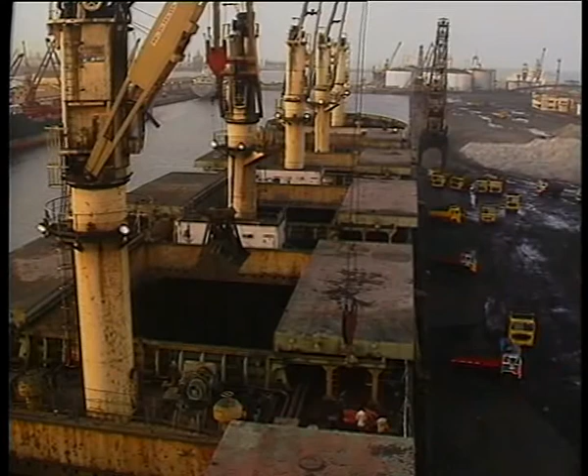Bulk carriers are the workhorses of the world maritime trade, and a high proportion of shipping losses are amongst them. Between 1989 and 1991, more than 10 vessels sank every year, and many more have been found to be severely damaged. Analysis carried out by classification societies reveals that previously damaged vessels become casualties.

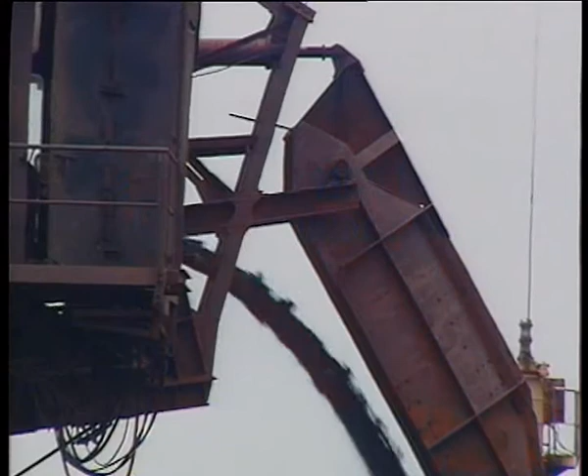The most common cause of damage is corrosion, which weakens the ship's structure. Corrosion increases with age. A number of cargoes, such as coal, with high sulfur content, cause rapid corrosion of the hold. Corrosion increases when the protective paint coating of the steelwork has been worn or wasted away.

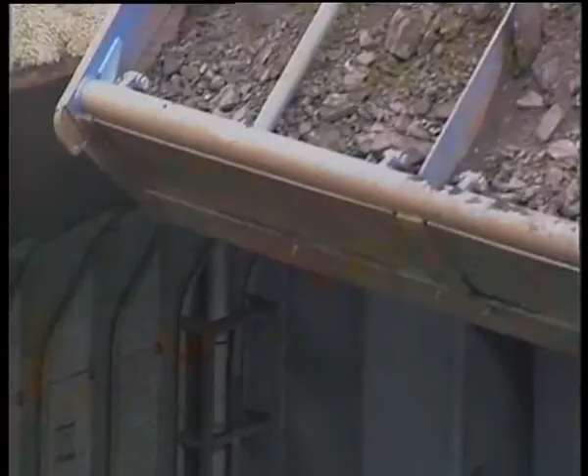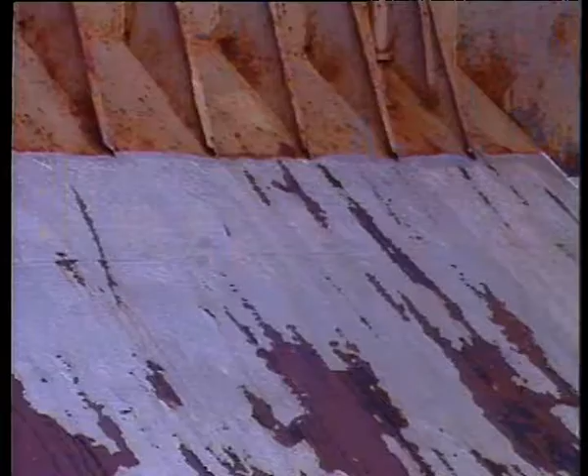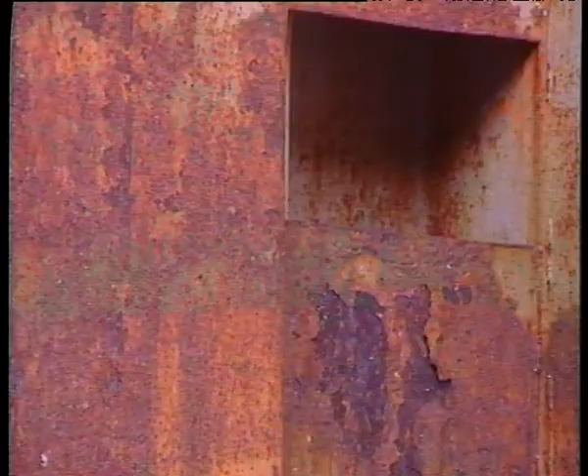Corrosion can be reduced by keeping the holds well painted, cleaning thoroughly after a corrosive cargo has been carried, and by rinsing the holds with fresh water whenever possible. Wasted steelwork, when neglected, has been the basic cause of most bulk carrier losses.

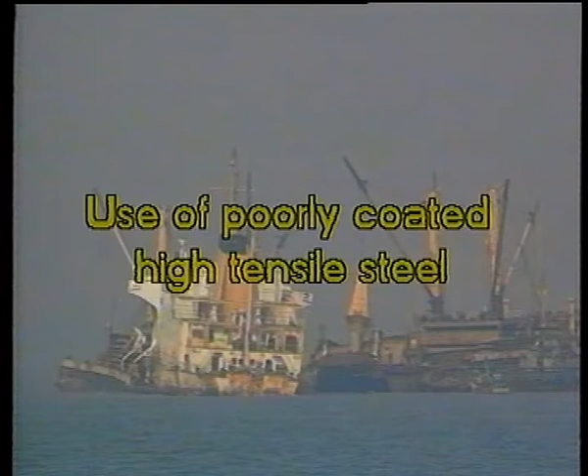Other causes of losses are use of poorly coated high tensile steel, nature of cargo, failure of hatch covers, flooding of holds, possible shift of wet cargo.

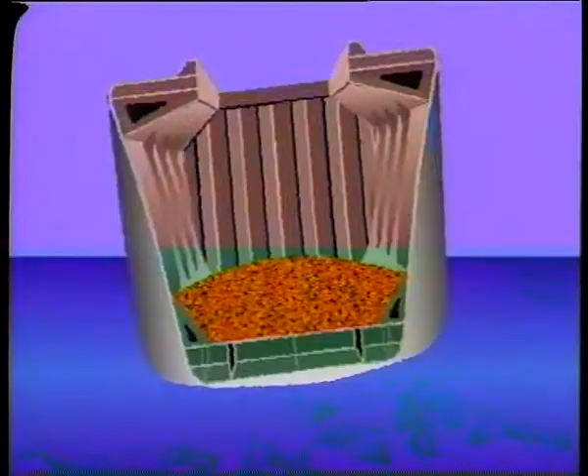Heavy weather conditions have been the main contributory factor in most of the accidents. Heavy swell causes hull vibration. Panting and poundings lead to structural failure. Although ships are designed to withstand this, a weakened ship is at a greater risk.

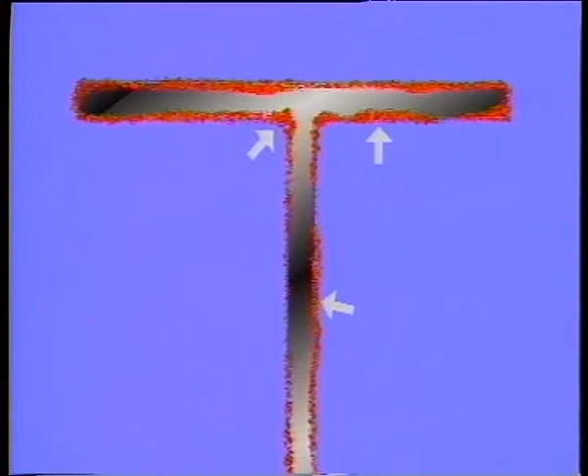Modern ship construction uses high tensile steel, which is thinner and therefore more flexible. Uncoated or inadequately maintained high tensile steel is vulnerable to corrosion. Wasting due to corrosion increases the stresses in the structure. Prevention of corrosion is thus of utmost importance.

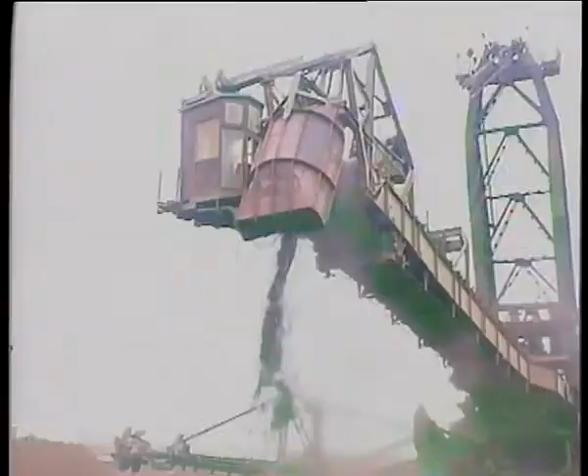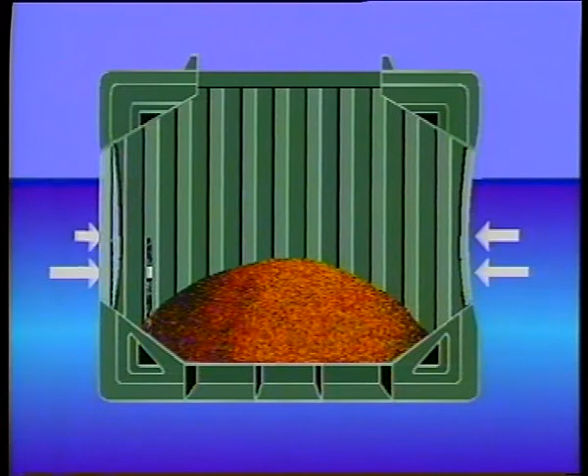Ore, due to its high density, does not occupy much space in the holds, and therefore the water pressure acting on the ship's side is not balanced from within, as is the case while carrying coal or grain. In a badly maintained vessel, bending will loosen the top and bottom ends of the frames. Because of these deficiencies, seawater may enter a hold through fractures in the side shell.

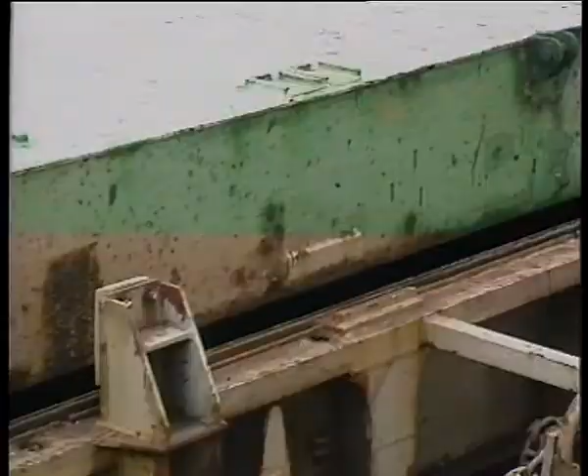Hatch covers which are badly maintained are an important cause of casualties. If the hatch covers have not been correctly cleated down, in heavy weather they may spring open, allowing the flooding of a hold.

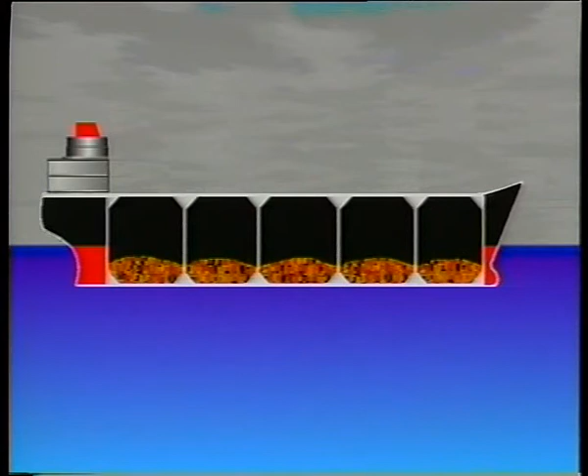Flooding of the number 1 hold is a major cause of bulk carrier losses. A hold loaded with iron ore has a lot of empty space. A large quantity of water can enter the hold, increasing the trim by the head. Other hatches will soon be awash, increasing the risk of flooding numbers 2 and 3 holds. Once this happens, the ship may nosedive and sink without much warning.

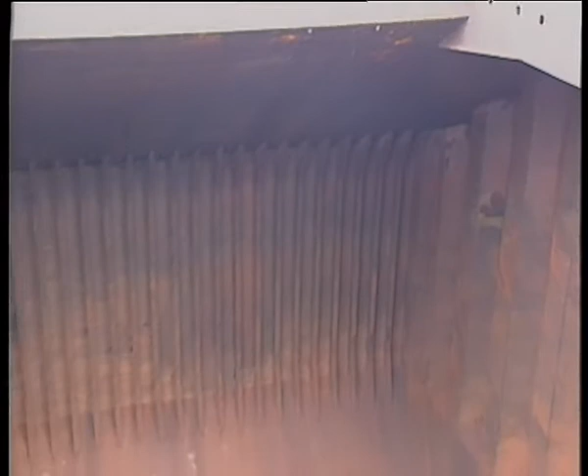Certain types of cargo liquefy easily and can shift in the hold. The ship may capsize, or hull and frame structure may collapse.

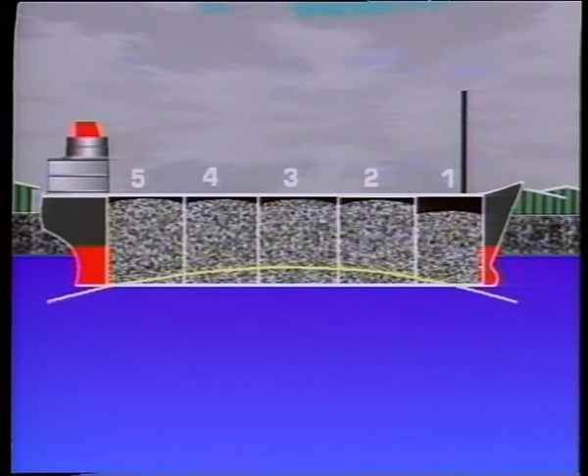A ship is like a beam supported by buoyancy and subjected to load due to its weight and cargo. The buoyancy and weight of a vessel are not uniformly distributed. This uneven distribution causes shear forces and bending moments on the hull girder, depending on the pattern and amount of loading. Loading, when badly planned or carelessly done, is a serious cause of damage to ships.

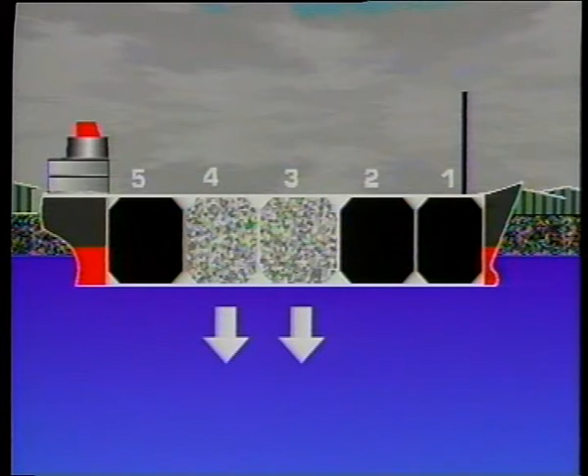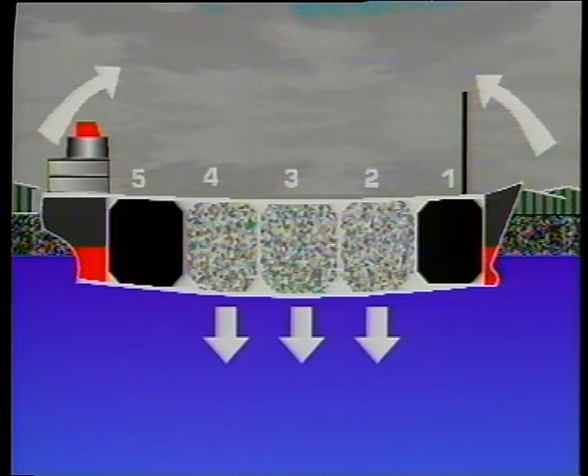Local overloading is putting more cargo in one part of the ship than it was designed to carry. One cause of this problem is block loading, when 2 or more adjoining holds are heavily loaded. A second cause is putting a greater tonnage of cargo into a hold than it was designed to carry. This may happen if the ship loads to tropical marks and carries minimum bunkers, or if a mistake is made and more cargo is loaded in a hold than was intended.

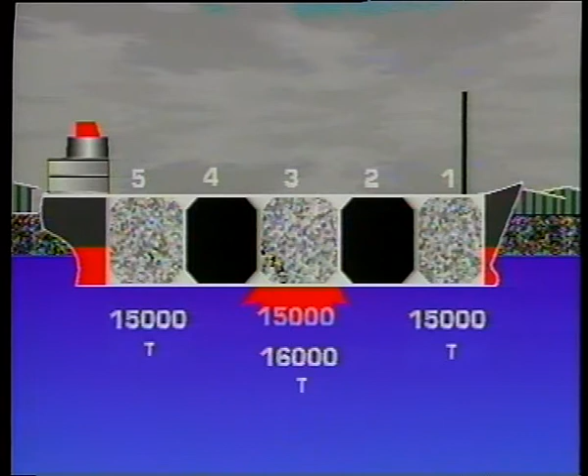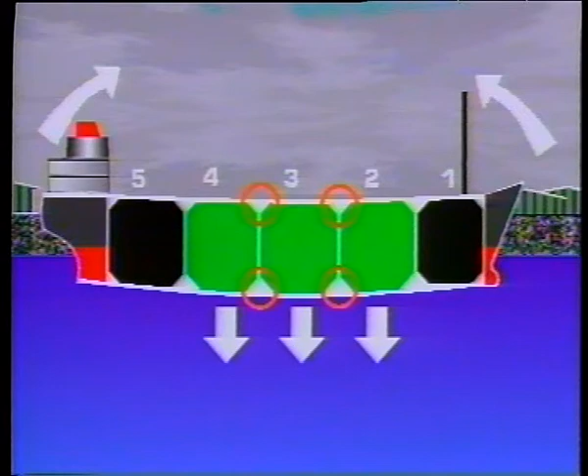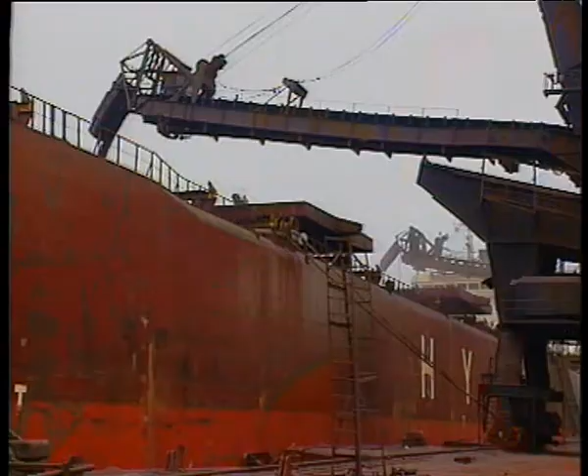Local overloading damages ships. If the planned loading is not shown in the loading manual, the owners should be asked to clear it with the Classification Society. The chief officer should plan the loading, taking into account the deballasting capacity and stability data of the vessel. The number of chutes available, their height, and the depth at berth should also be considered.

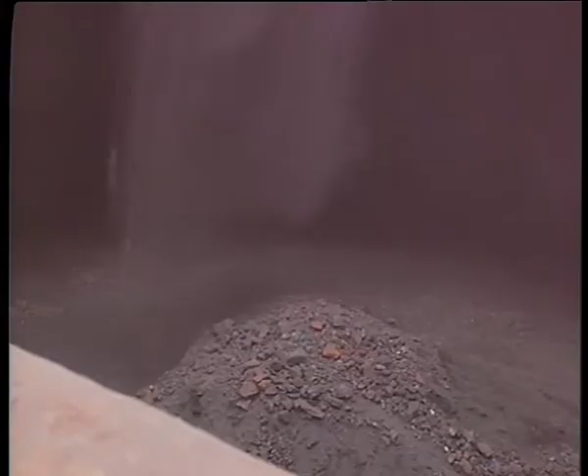The loading instrument provides valuable support in loading and unloading operations. If it is available on board, use it extensively to obtain maximum benefit.

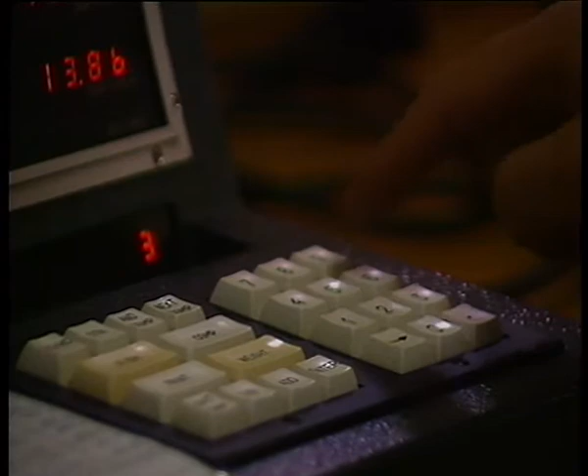Three good reference books are available to help the officers of bulk carriers. The Bulk Carrier Code from the International Maritime Organization provides basic regulations and guidelines for carrying bulk cargoes. Guidelines from IACS give detailed advice on surveys, assessment and repair of hull structures of bulk carriers. Bulk Carrier Practice, published by the Nautical Institute, is written for the officers of bulk carriers and explains all the jobs such officers must do.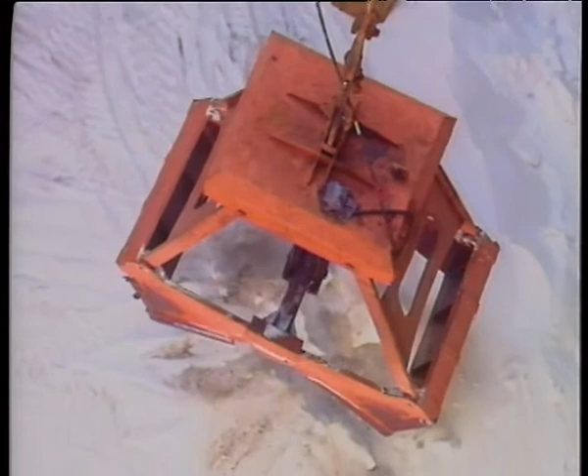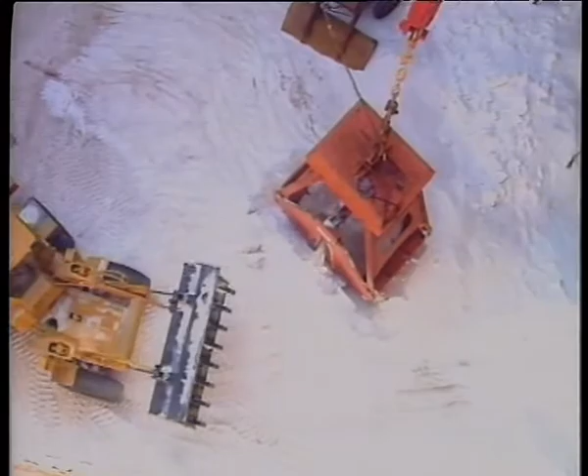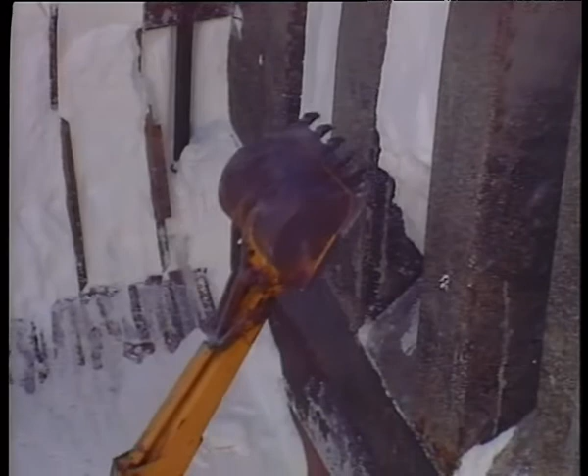Steelwork is damaged when heavy cargo grabs strike it. Bulldozers and hydraulic hammers also cause such impact damage. Care must be taken while using them, especially in number 1 hold, because of its special construction. Stevedores must be properly supervised. Inspect before sailing and during ballast passage. Attention must be given to damage found.

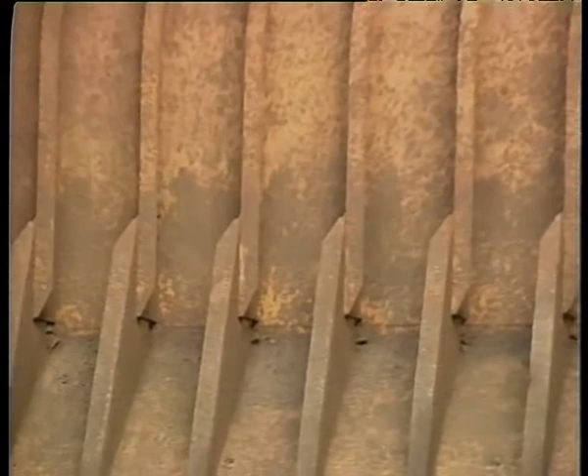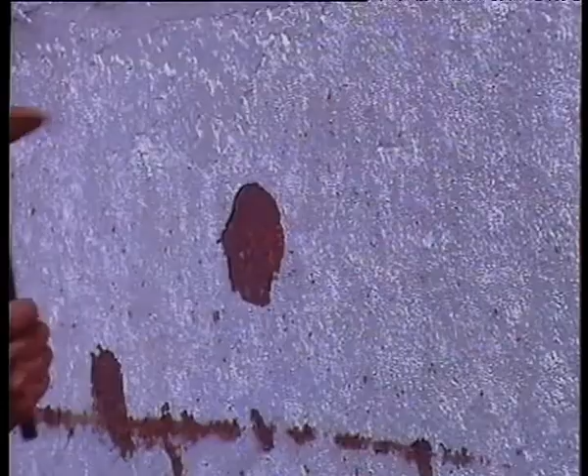Are these losses inevitable? No. This is what you can do to prevent them. Ship's officers should make a thorough close-up inspection of all holds at least once a year, keeping within hand's reach of the steelwork. Holds must be clean, free of cargo residue, and scale must be removed to allow inspection of sound steel.

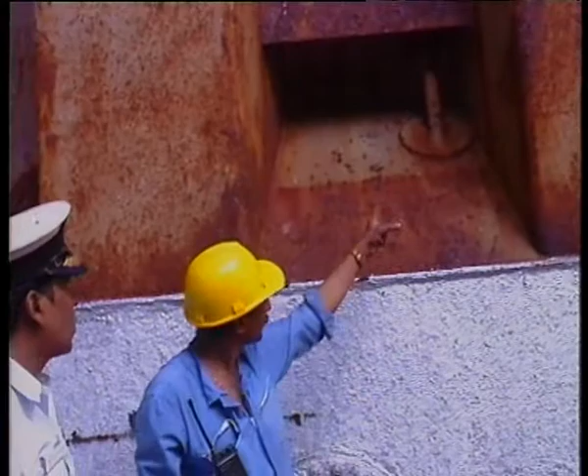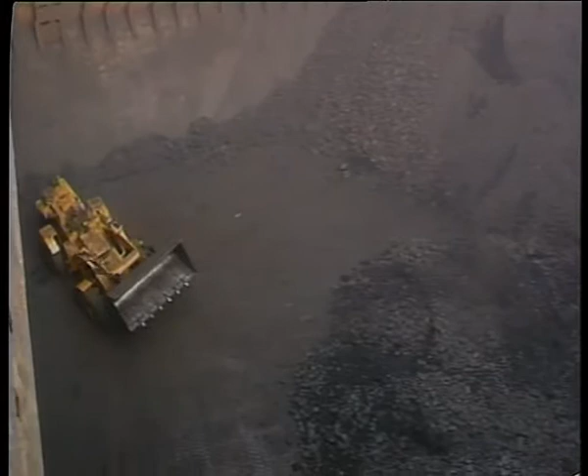Ship's officers should look for damage caused by corrosion, namely accelerated wastage and possible grooving, fractures in the web of the frames and end brackets, buckling of the side shell frames, detachment of frames from the side shell, fatigue fractures, deformations due to operational procedures, for example, stevedore damage.

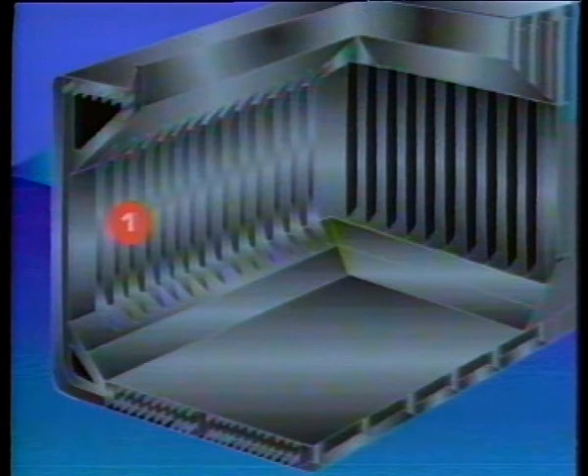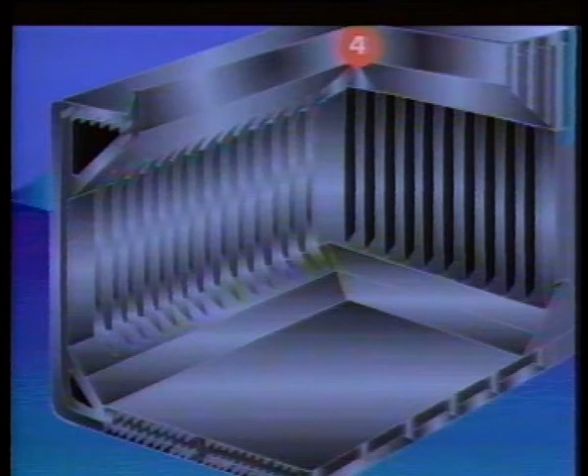Major areas where structural weakness occurs should be examined as often as possible. They are main side frames and their connections, boundaries of transverse bulkheads and bulkhead stools, cross-deck structures, hatch corners and hatch coaming brackets, localized cracking and buckling of web frames, and breakdown of coatings in water ballast tanks, the intersection of the inner bottom plating and the hopper plating.

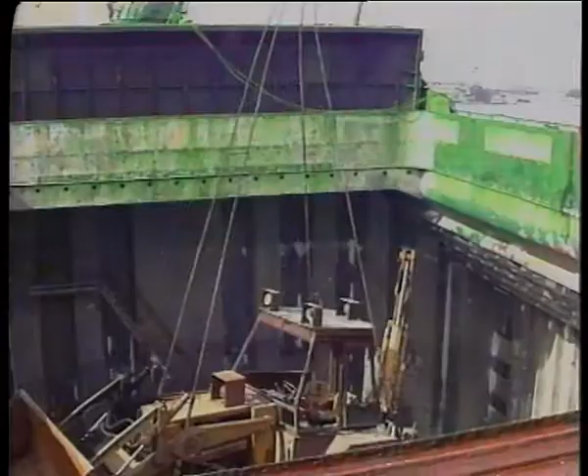Records of inspection and action taken by ship's personnel should be maintained with reference to structural deterioration, leakages in bulkheads and piping, conditions of coating or corrosion protection, identified suspect areas, previous repair history. Bulk carriers may age fast, but seaworthiness can be extended through the efforts of all concerned. Despite precautions, some damage may occur. It must be detected and repaired.

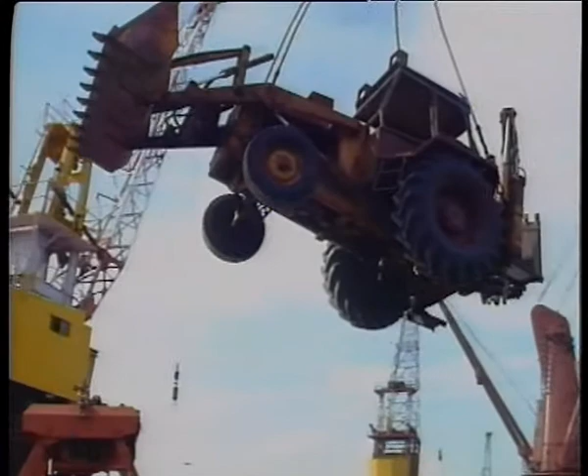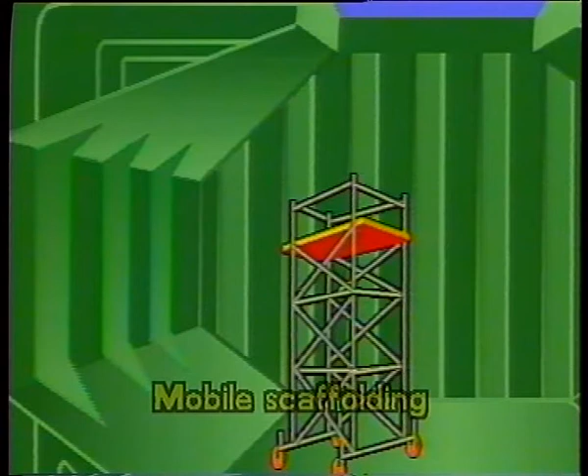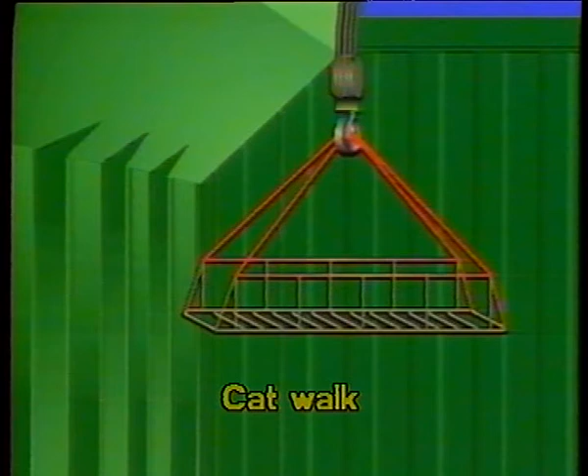Classification societies have recommended minimum requirements for close-up survey, depending upon the age of the vessel. Access to the ship's side frames is a major problem, and various equipment is used to overcome that. Equipment used includes ladder for lower brackets, mobile scaffolding, cherry picker, catwalk hung from a crane. While inspecting, necessary safety precautions should be strictly followed.

Look after your ship and prevent damage due to corrosion, by stevedores, other external agents, by local overloading, and defective hatch cleating systems. Slow down and do not force the ship when meeting heavy swell. Inspect regularly for damage and deterioration, and when it is detected, have it surveyed and repaired.

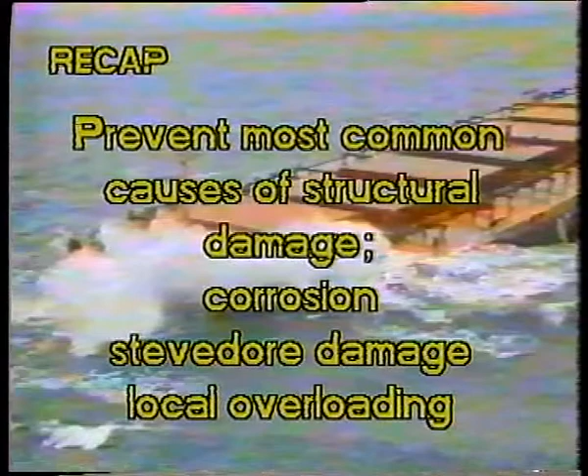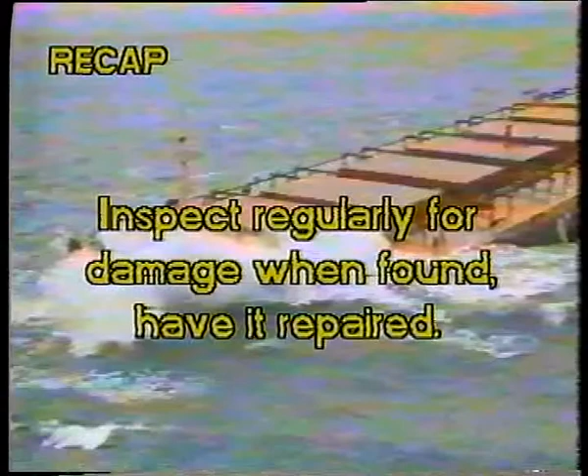Remember, 1. Bulk carriers with weakened structures become casualties. Prevent this. 2. Prevent the most common causes of structural damage: corrosion, stevedore damage, local overloading. 3. Despite precautions, some damage may occur. It must be found, reported to owners, inspected and repaired. 4. Inspect regularly for damage. When damage is found, have it repaired. 5. Follow Classification Society recommendations.